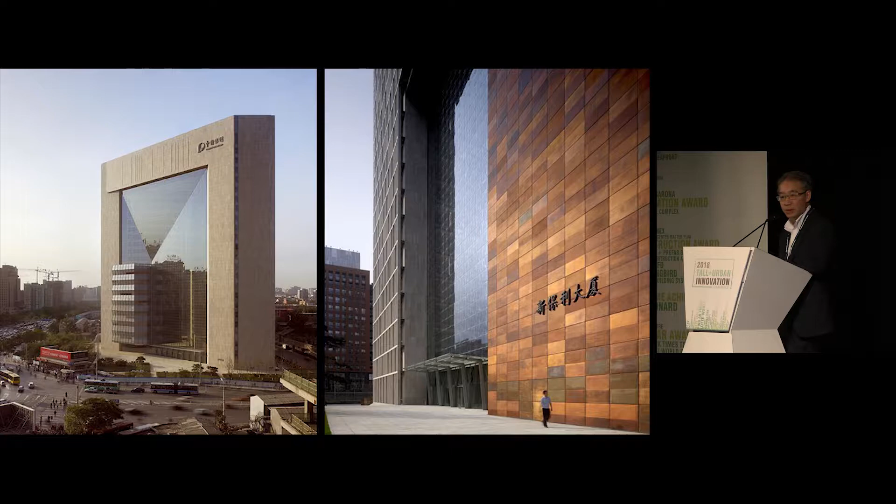To begin with, one of the things I wanted to mention about Poly is that we've had a very long relationship working with them, beginning back in around 2003. And this relationship and collaboration has really been very important, I think, to both organizations in the way we approach the projects together.

That comes from, I think, our search for a solution and a form that grows out of trying to address the specific issues of the project rather than coming to it with a priori ideas. I think what has made our interaction with Poly particularly fruitful for us has been the fact that the two companies really have a set of shared values when it comes to these projects.

Poly International Plaza is a speculative office building, and what we wanted to do, and what we were really encouraged to do by Poly, was to challenge the typology of the speculative office building and try to really bring something new to it.

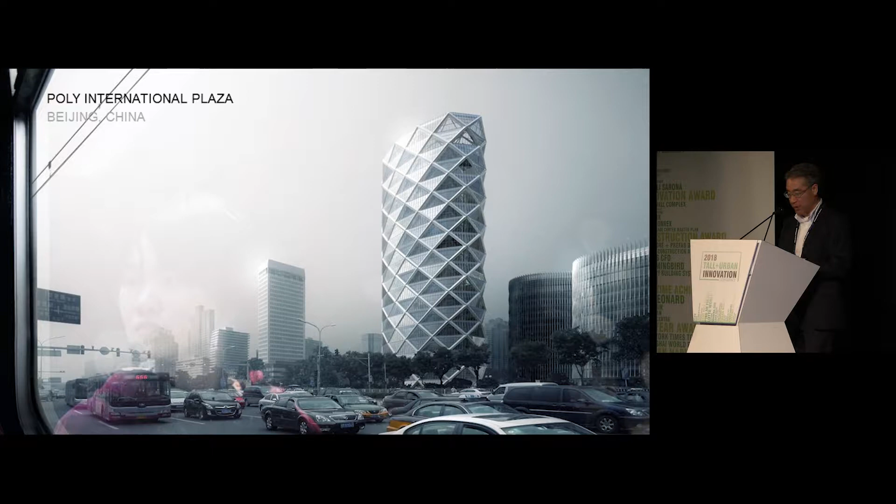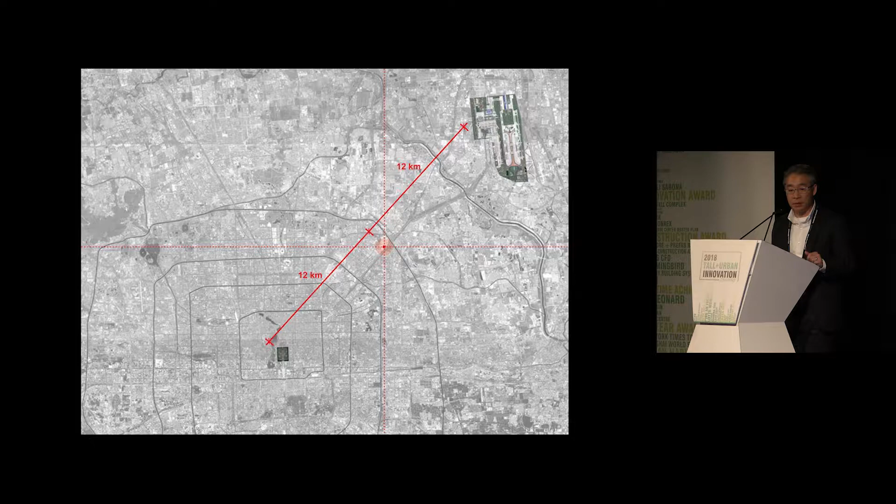So the project itself is located exactly halfway between the Forbidden City, representing the past, and the Capital Airport, representing the future. It's located immediately adjacent to the 5th Ring Road intersection with the Capital Freeway.

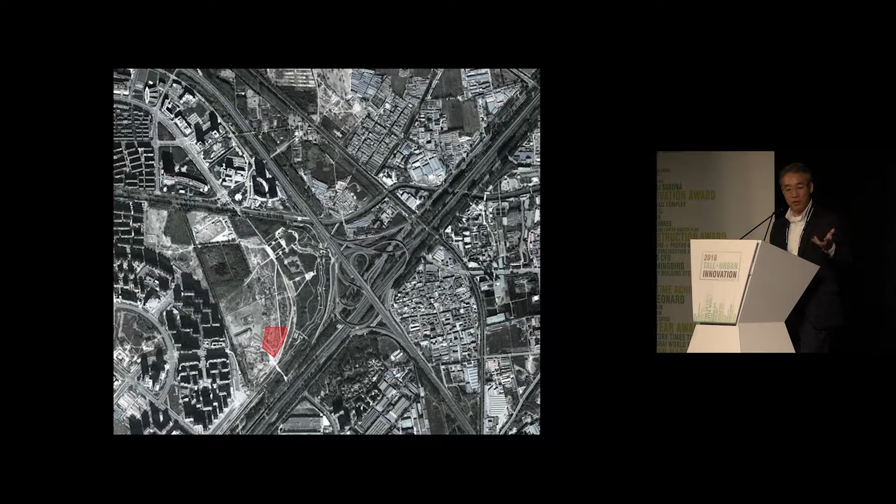You can see from this aerial one of the big challenges of the site, which is that the master plan to the southwest has this radial geometry, and yet, as good practice, all the residential buildings are oriented to the south. So we have this clash of geometries occurring, and then that geometry encountering the geometry of the freeway system.

So when we looked closer at the site, one of the things that became a real challenge for us was how do we create a place where it would be inviting for people. You can see to our north and west there are residential buildings, again, these linear slab buildings, which we needed to protect for access to daylight.

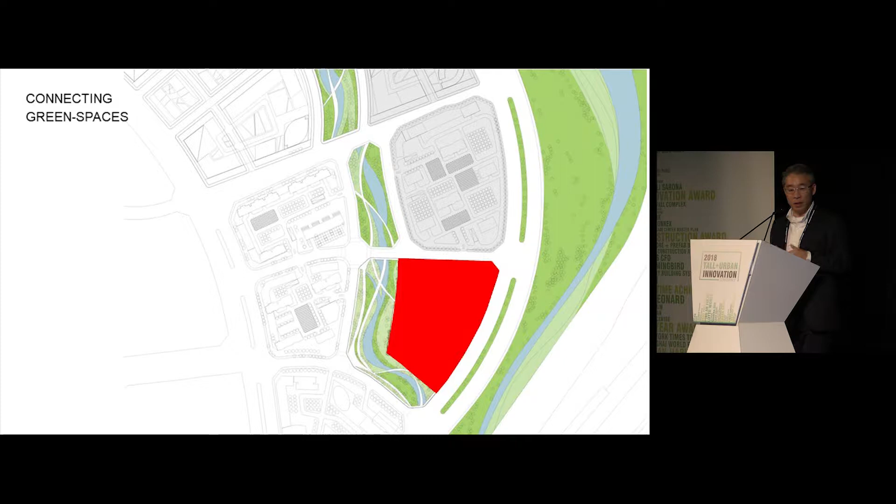But one of the things we saw right away was that rather than try to directly address the challenges of the geometry, we had an opportunity, which is that there was an open space to the east, which actually is the green space buffer to the freeway, and then the main open space in the center of the development. So the idea became, rather than try to build a building with a tower with podium, to think of the buildings as pebbles in a green stream, and to allow the park to flow through the site and completely eliminate the podium, creating more park space for people to move about and enjoy.

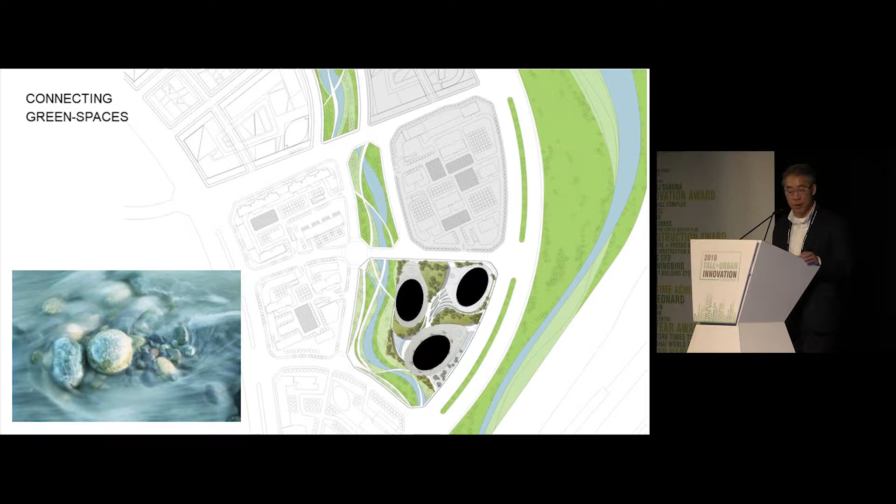One of the ideas behind the forms was pebbles in a stream, which became more than a metaphor. As we did detailed fluid dynamic wind analysis to see how the buildings would perform and how the ground level environment would feel for pedestrians, the forms allowed winds to pass through, minimizing downdraft and creating minimal turbulence compared to the much taller buildings immediately to our northwest.

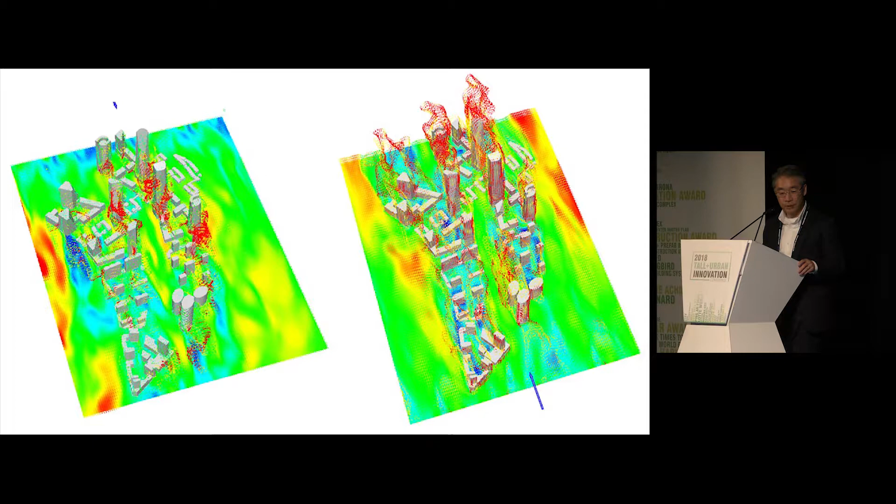Looking at an elliptical building for office use can seem challenging due to efficiency concerns. When we first looked at the layout, we wanted to eliminate the space at the ends of the building, since those areas are the least efficient and most difficult to lay out. The ends were also challenging structurally, because the shape tended to create torsion in the building.

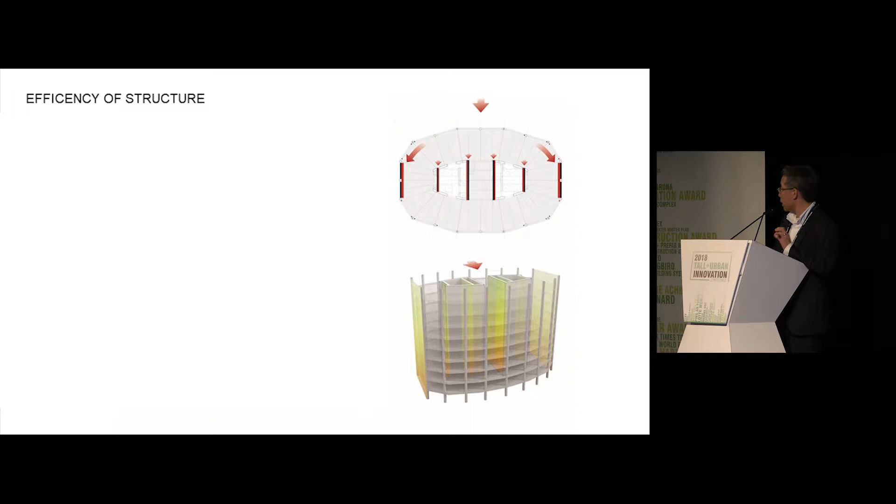Rather than going with a traditional column and shear wall system carrying lateral loads through the building, we worked with our structural engineers to develop a diagrid system that takes the lateral loads around the perimeter of the building. This allowed us to cut two large 29-story atriums at either end of the building, eliminating the least efficient space while creating a more efficient structure.

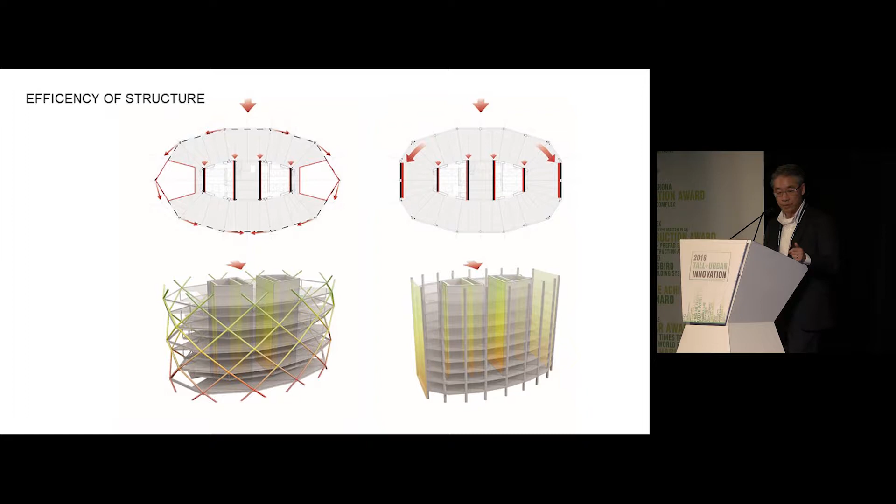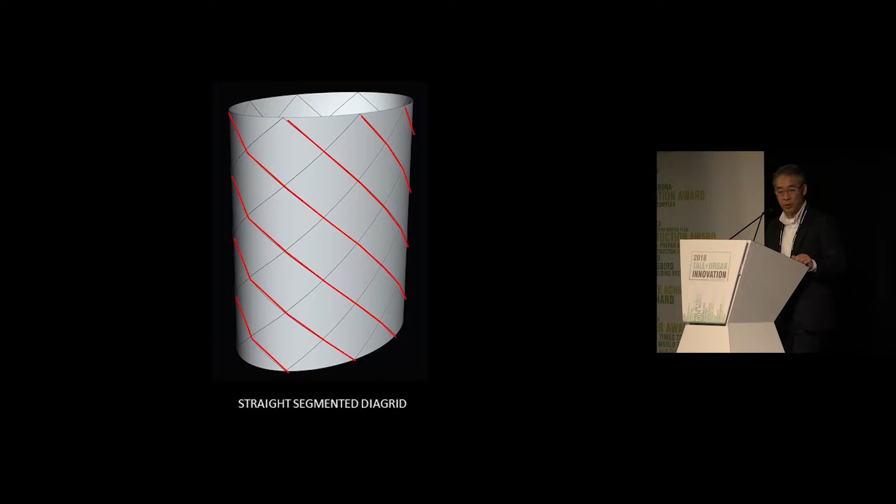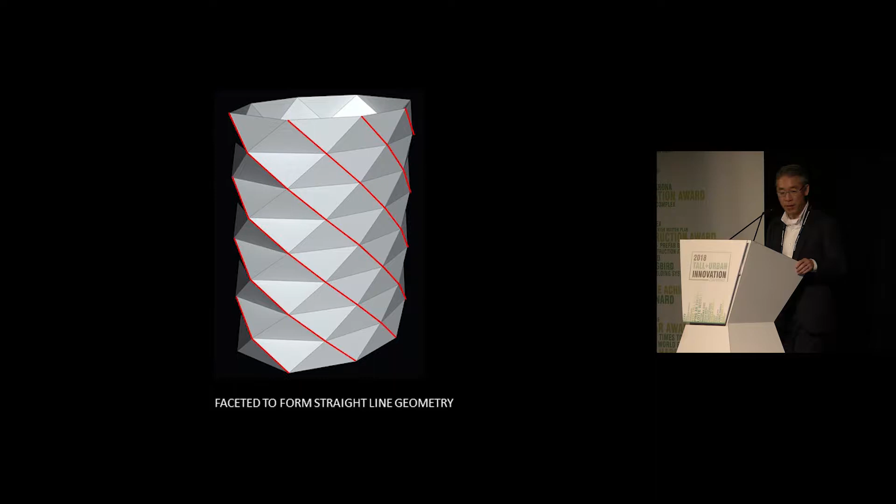When you look at a diagrid on an ellipse, the question becomes whether you create curved structural elements, which was something we did not want to do. So rather than having radial curving structural elements, they were flattened. This resulted in a form that allowed all the glazing to be flat as well, producing the faceted form you see as the final shape of the building.

When we started talking about this with our engineers, we used a paper model to explain it, and the paper model naturally formed those facets. It turns out this is a natural structural phenomenon where the paper relieves stresses in the most natural way, creating a form evocative of a Chinese lantern. We thought that was very appropriate, given the building is a lantern at the gateway to the city, a traditional symbol of welcome.

The structure itself was very carefully analyzed by our group. This illustrates the node intersections, which were analyzed carefully for their stresses as well as constructability. The lower portions of the tower have tubes that are concrete filled, so it was very important to ensure the concrete could flow smoothly through those nodes and be easily constructible.

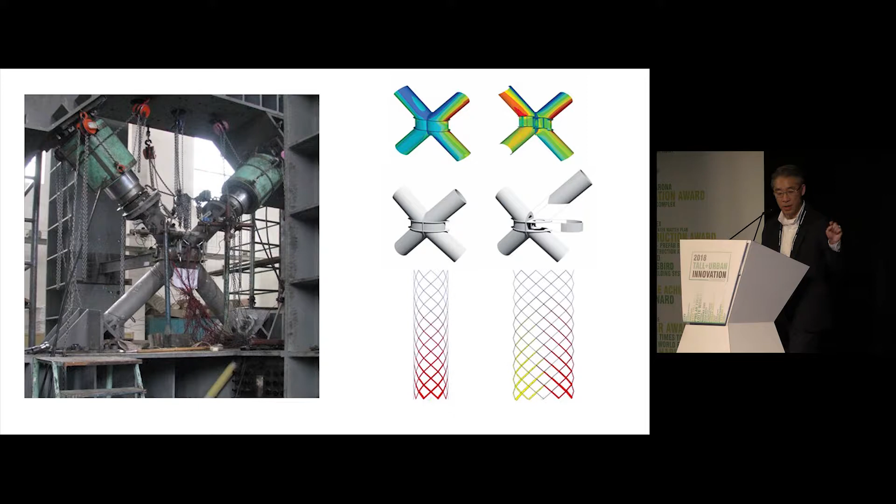Another aspect of the system, one of the things that makes it unique, is that we wanted to keep the members in pure axial load, so there's no bending introduced into the structural members. You can see in the diagram at the bottom that all the members are experiencing pure loads.

The nodes are pre-manufactured and brought to the site. Here you can see the overall structure. The way we avoid bending in the diagrid is that every other floor is actually suspended from the nodes above, making that system lighter and more efficient because it's in tension. The nodes are the only points at which load is transferred into the diagrid, making it very efficient.

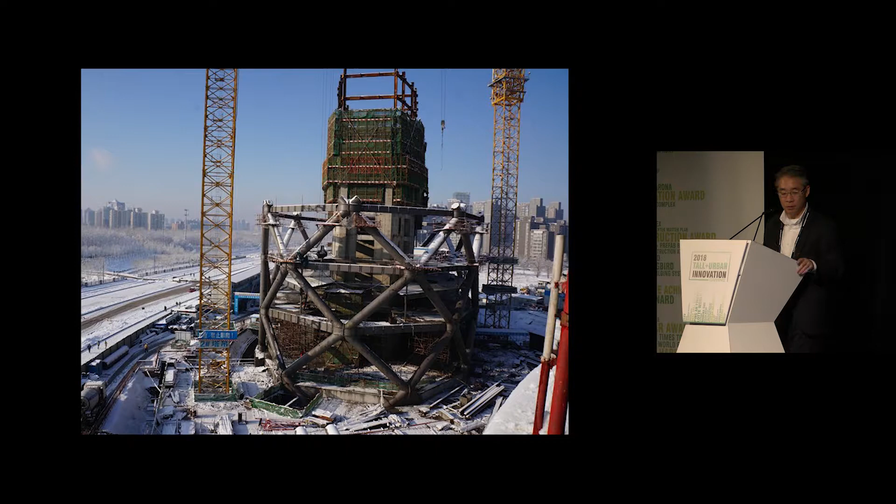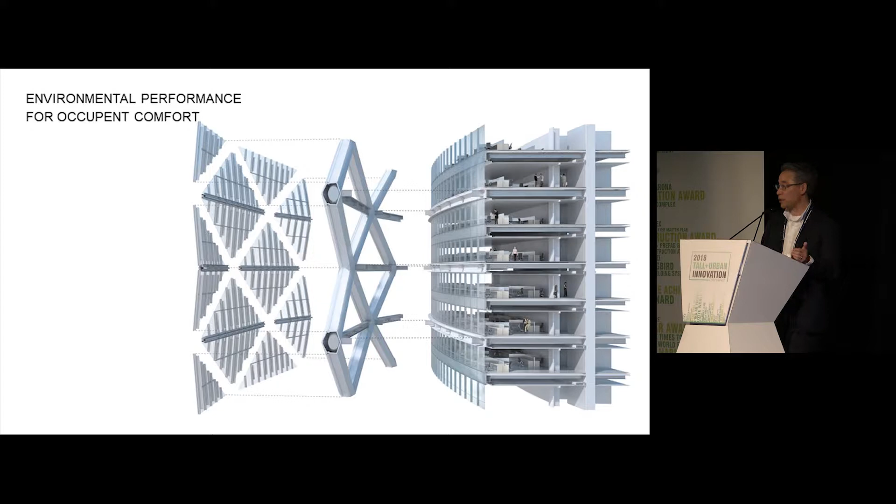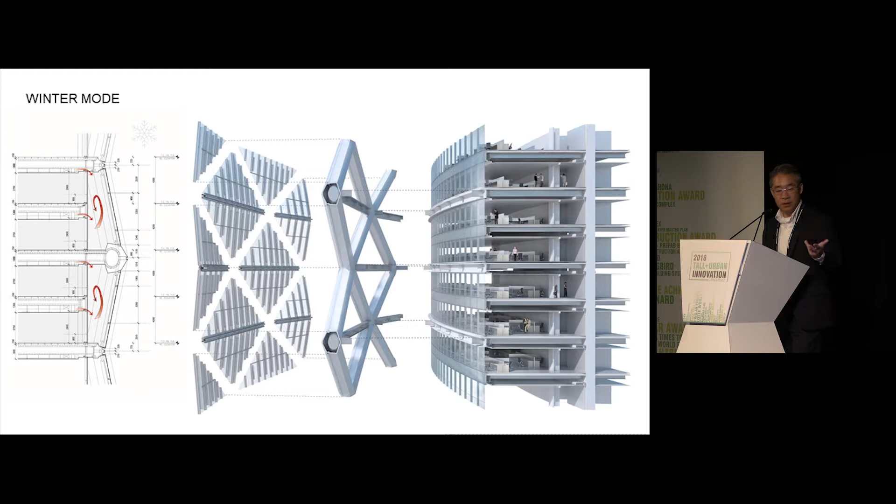The diagrid gave us a second opportunity, which was very important: how do we create a building that maximizes daylight while maximizing human comfort? With large panels of glass, particularly in wintertime, the challenge is cold. So we introduced a double skin system, flat on the outside, vertical on the inside, sealed in winter and ventilated in summer to keep the building cool. The intervening floors also act as sun shading to protect the building during summer.

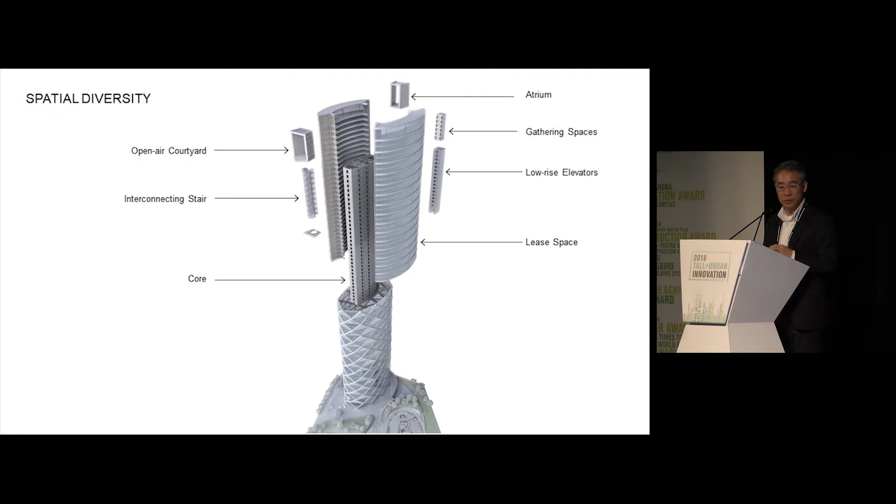Rather than filling the structure with floors the way you might with a conventional building, we thought of the different programmatic elements as pieces that can be inserted into the structural frame. So you have the traditional core, lease space, and elevators, but above that, within those atriums, we introduced a series of social spaces and ways for people to connect: stairways, gathering spaces, meeting rooms, courtyards, and additional atrium spaces.

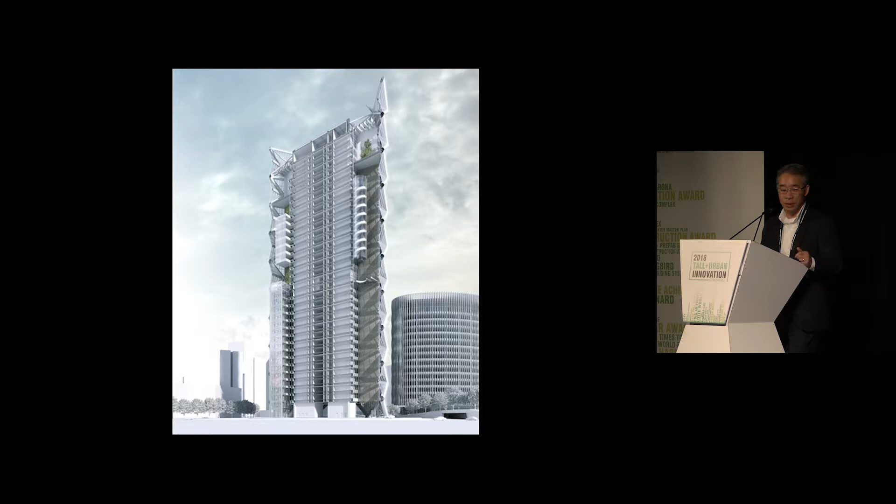When you get to the top of the building, if you were to take a cut through it, you see how connecting stairs and these mini atriums with greenery create a very unique and special environment at the top of the building.

And then at the very top of the building, rather than simply cantilevering, the structure folds back on itself to create the crown, anchors itself back into the core, and ties the whole structural system back together again.

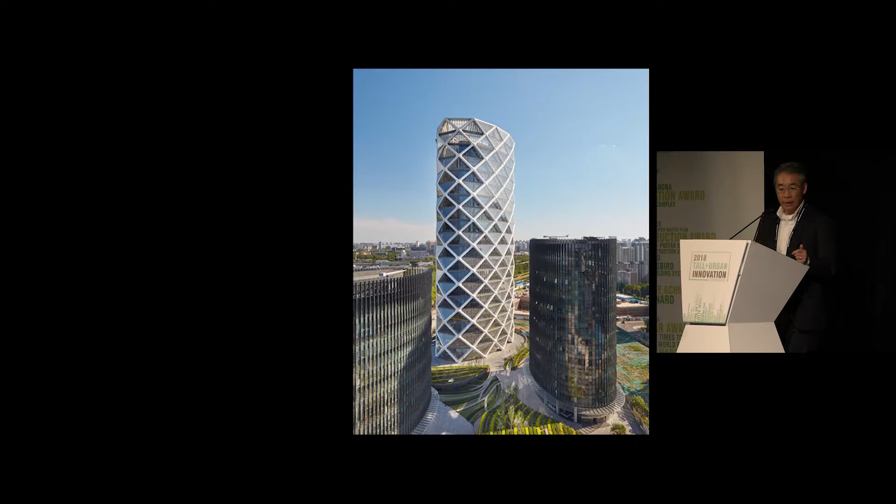One of the things about eliminating the podium is that we had to contend with all of the car ramps, basement air systems, and other emergency egress coming up through the landscape. So what we developed with our colleagues at SWA, who did the landscape, was an undulating carpet of green that covers all of those functional elements. In this very flat terrain of Beijing, you get an area with topography covered with green, which also allowed us to create openings to lower levels where amenities for users of the building are located, giving daylight as well as immediate outside access for those spaces.

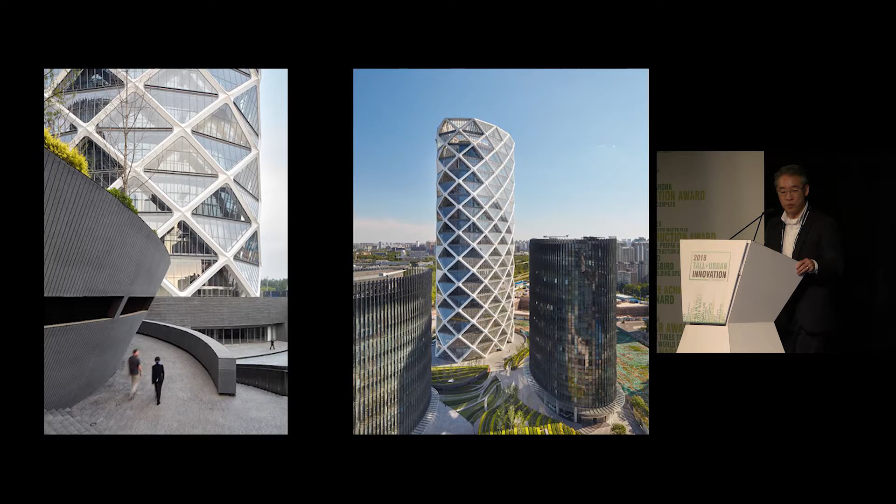A view of the diagrid. A couple of special technologies were utilized to build this. One thing about the system is that the geometry really drove itself. The nodes and the cladding borrowed from the aerospace and automotive industry their technologies for stretch forming metal. These are not simple curves; they're all compound curves and required special forming techniques. You can also see the ventilation at the floor, every other floor line.

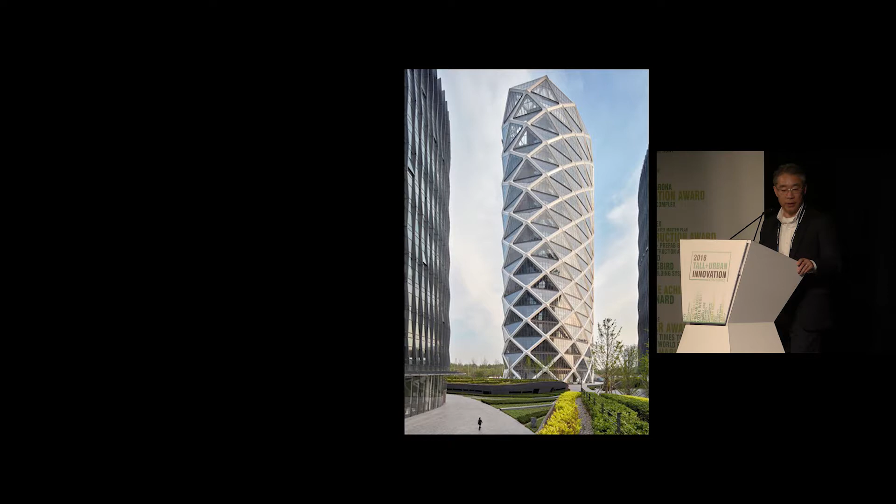And then at the base of the building, the glazing peels away to reveal the inner layer glazing for the lobby. Approaching the building, you approach at the narrow ends, which are aligned with the Capital Freeway, so when you're approaching you see the narrow end. As you come out of elevators, you're either looking downtown towards Beijing or north towards the airport.

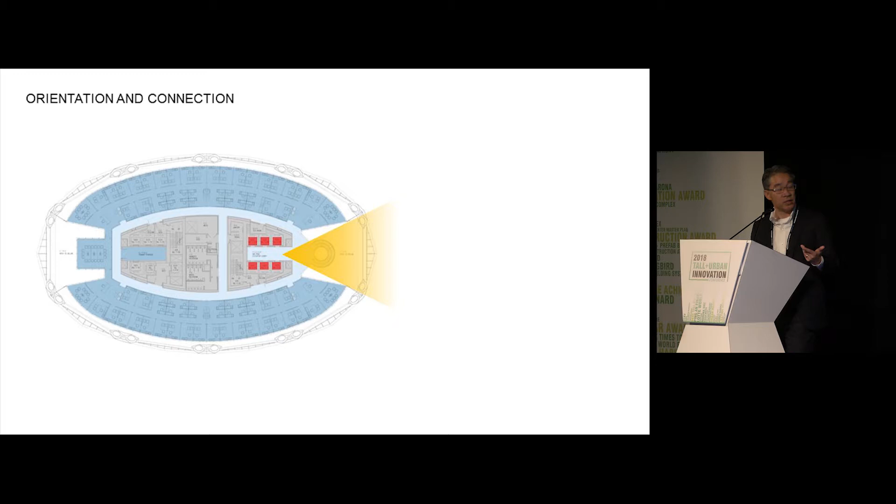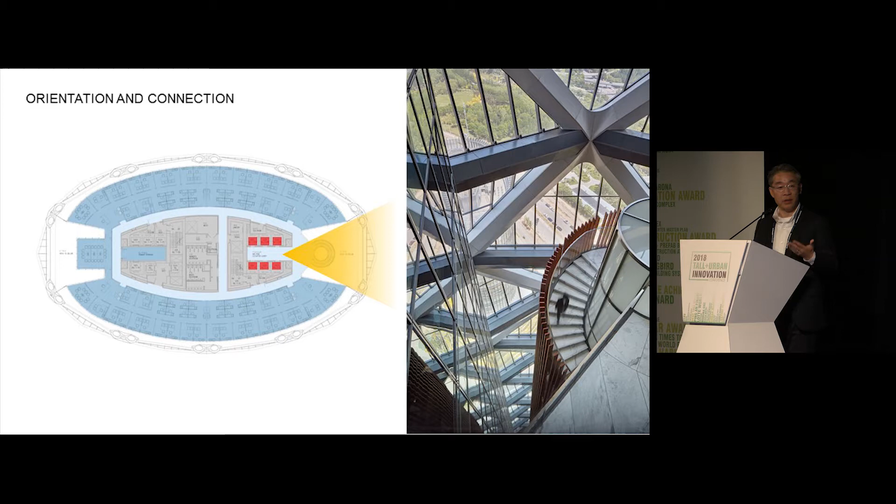This is unusual because when you step out of the elevators—and this is true for all of the elevator banks, low, mid, and high—you're immediately presented with a view of the outside, reconnected to the exterior and a sense of where you are in the city.